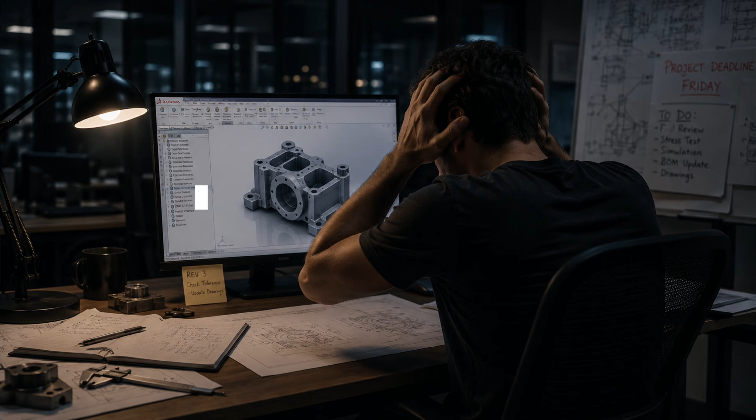Now we're only 4 years into the future, and the time for safe debates is over. The theoretical threat is now a reality, and the answer is no longer a mystery. If you're not above average, you will be replaced—not by AI, but by something far more likely.

Since the start of 2026, I've been living with a high level of stress. I've spent 19 years in this industry. My lifestyle, my business, my source of income, built on SOLIDWORKS. I got tired of searching for answers from experts who don't actually model, so I decided to find the truth for myself and for other mechanical engineers.

I decided to build an AI that could replace me. I went dark. I stopped uploading YouTube videos. I stopped responding to my emails. I spent 10 hours a day, every day, working with Claude Code and SOLIDWORKS API. I took advanced classes, failed 1,000 times, and pushed myself to a breaking point to see if my 19 years of experience could be reduced to a single prompt.

3 months in, I built what I call cadBase. It's a module that companies have raised millions to develop, and I built it alone in my room. And when I finally ran the comparison, I was both shocked and relieved.

This baseball bat was designed by an AI. You see, it has the details, it has the handle. Look, I 3D printed it. Home run. It was not made by me. It was not made by a human. This is made by AI.

Now I'm going to demo this, because obviously I have practice with a baseball bat. But what I have not practiced are a bunch of random things I'm going to ask it for the first time, on screen. Design a baseball bat. I wish I made a timer. I can count 1, 2, 3, 4, 5 and add the rest to it.

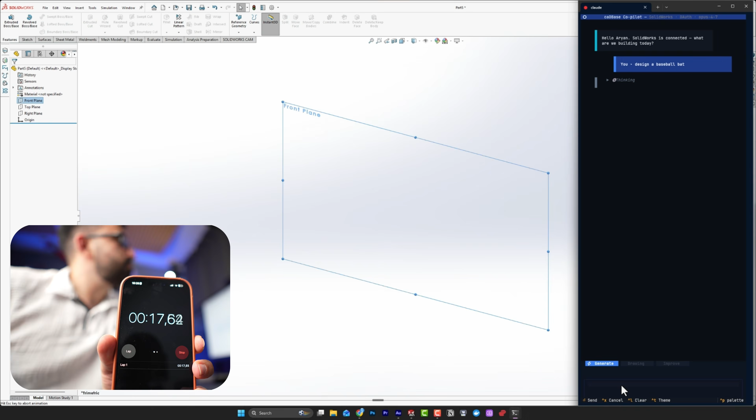All right, how much? Pause, stop. This is the baseball bat. Now let's continue with more advanced stuff.

Round all the sharp edges. Okay, sharp edges are rounded. I can see that. Now let's try to make things I haven't seen.

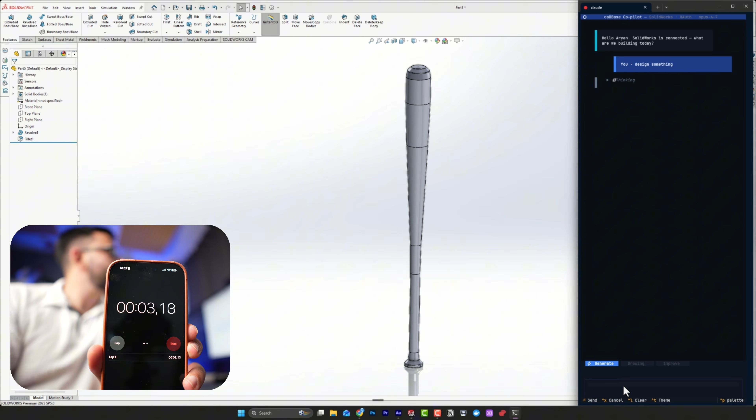It's gonna be fun. Okay, let's go with, design something. And let's time it. Is that a rook? I play chess. It looks like a rook.

Design a pawn. What? Oh, it wasn't finished, it was still working—that's why I couldn't type. The pawn's started, we have a pawn. Let me see if the rook actually worked or failed. Failed silently, last feature. All right, let's design something else.

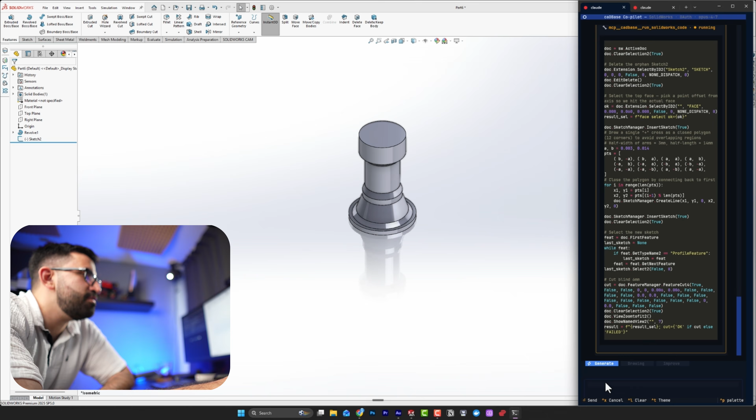What if we ask it to design a bishop? Maybe I can 3D print all the chess pieces that cadBase designs for me. All right, let's see—looks kind of like a bishop-y thing. I'll take it. All right, let's just do one more.

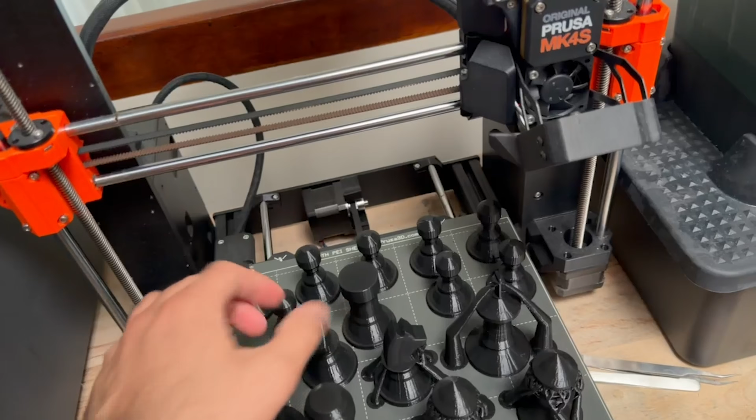Design a queen. Oh, the knight—the knight is gonna be challenging, huh? Okay, that's your queen. Not very queeny, but okay, we'll take it. Design a knight.

Riddle me this: 2 years ago, a beginner would have nothing to do, would stare at a blank canvas. Today, the beginner is right behind me. Think of AI as this tsunami—it's raising the floor. The beginners are being lifted up towards the pros. The gap is shrinking. But here's the part nobody's saying: AI didn't move the ceiling as much as it pushed the floor up.

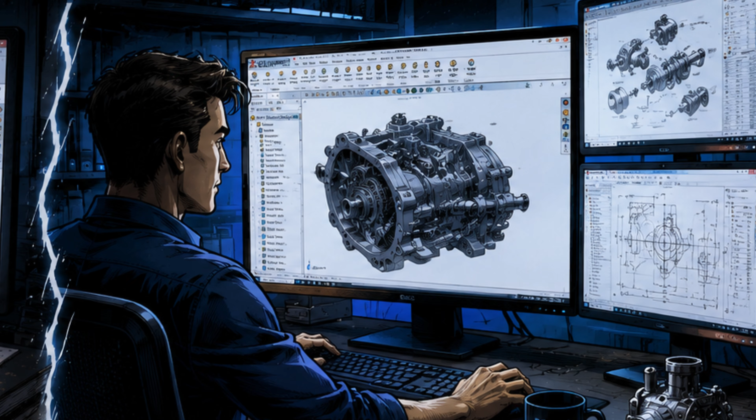If the water level is rising, the only way to stay relevant is to move your ceiling higher than AI can reach. Think about it: a few years ago, when a beginner had to look at a blank canvas, companies would pay top dollar to get pros and experts, because that extra money they paid brought them a huge difference in quality and speed.

Today, they're getting less leverage with the same amount of money paying for a pro than just an intermediate who uses AI. So the money they're paying today is not bringing that much ROI. That's why it's important to understand design and design intent, and not just memorize buttons.

And that's how I designed all of my courses for my students. It's about engineering logic—you need to oversee the AI. Because while the floor is rising, the history of our industry shows us that the tool is only as good as the person driving it. We've seen this once before.

I haven't, but some of you might have, back in the early 60s when Sketchpad came to life. Mind you, NASA created Apollo 11, planned and executed successfully before CAD—nothing but drafting tables, slide rules, and hand calculations. Those guys were giants, and if you're a mechanical engineer, you'd have respect for those engineers.

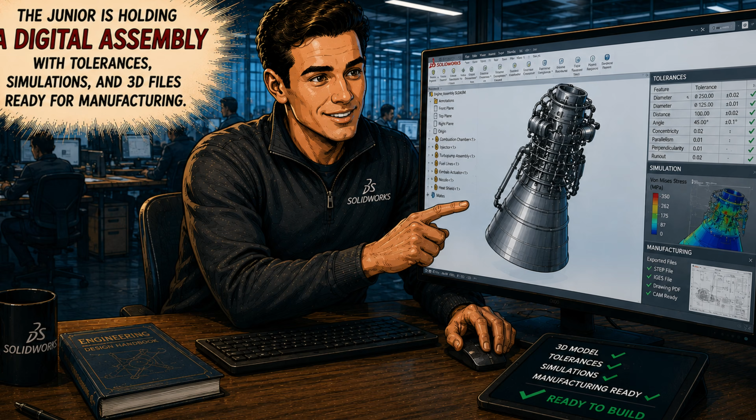But if you brought one of those giant NASA engineers from the 60s to 2026 and sat him next to a junior engineer fluent in SOLIDWORKS, who gets the job done faster? The NASA engineer might design something flawless, but he's holding a pencil and paper. The junior engineer is holding a digital assembly with tolerances, simulations, and 3D files ready for manufacturing. The junior might replace the giant, not because he's a better engineer, but because he has the better tool and he's more acquainted to it.

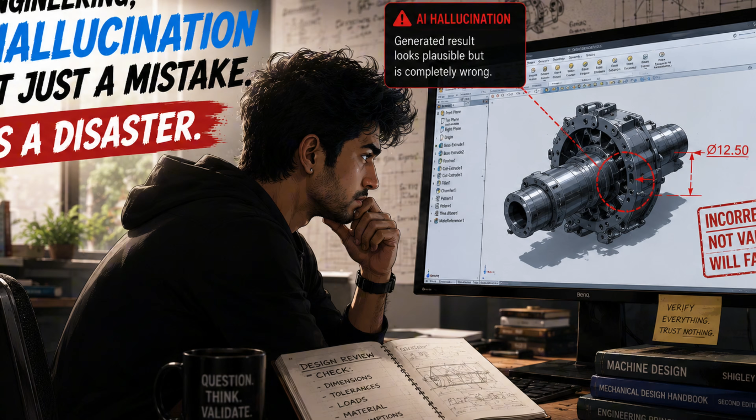The replacement isn't by the tool, it's by the user who uses the tool—in this case, the CAD designer who uses AI. But using AI doesn't mean asking ChatGPT to design a gearbox. That's a liability. In engineering, a hallucination isn't just a mistake, it's a disaster. If the water level is rising, you need a boat, not a toy.

But here's the thing: building a part is only one layer of this problem. My little AI module showed me what's coming—it can create basic models and help beginners. But as a real mechanical engineer, you need more than that. You need an AI that can understand materials, fasteners, mechanical concepts, previous designs, PDM, calculations, and a lot more.

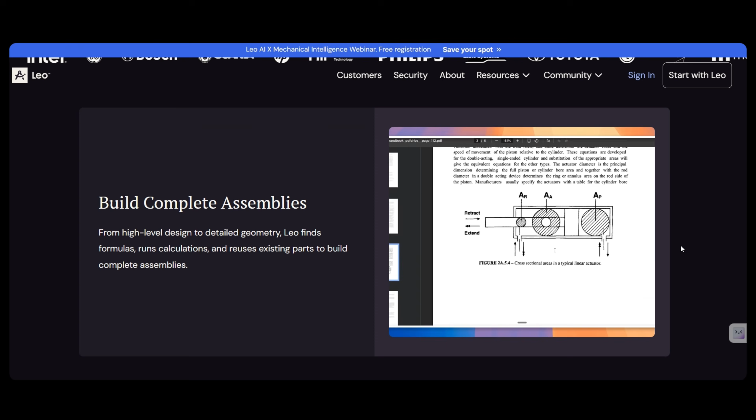For bigger companies, if you're working among thousands of other engineers who have been around for years, it crawls into the PLM. It finds the designs that already exist, scans the design you're doing, and tells you, hey, you don't have to reinvent the wheel—you already have a similar component designed and ready, you just have to use it in your design. You don't have to redesign this spring, for example, because the company had already designed these springs over the years, and you have so many options that are more or less compatible with your design. And even if it's not, it can generate one for you.

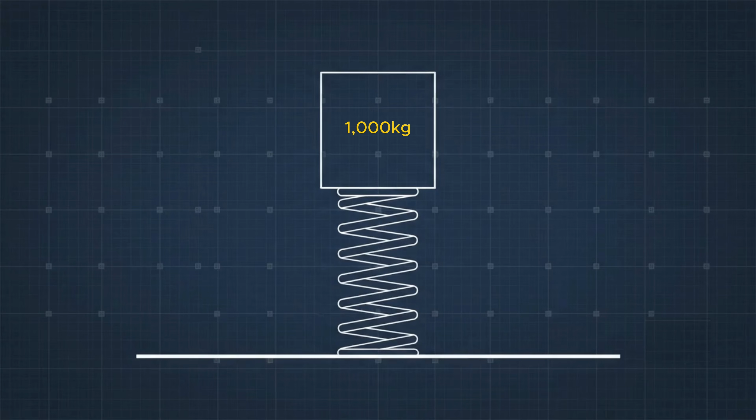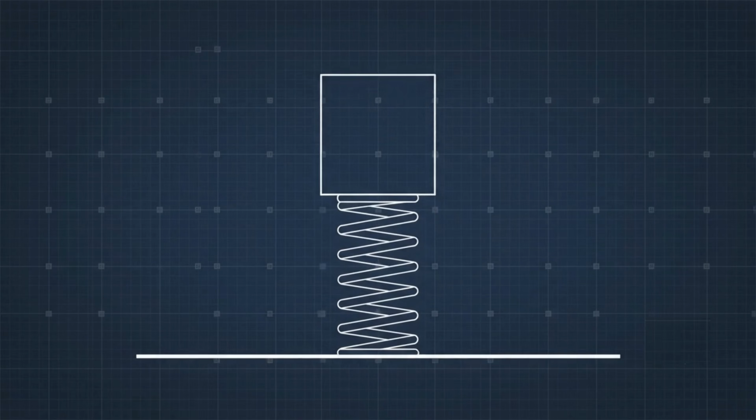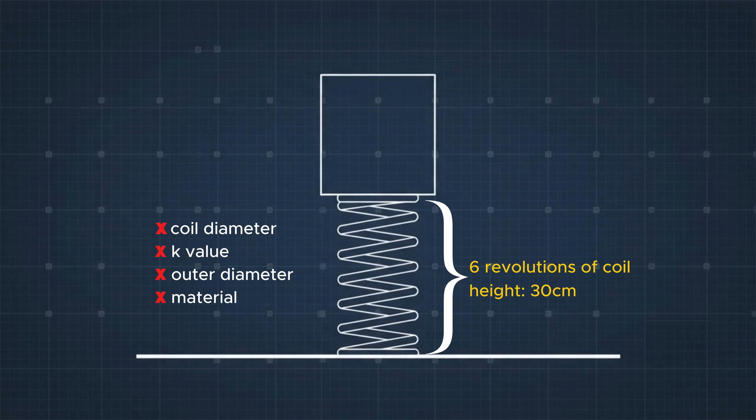Let's put that into a demo. I am designing a spring to put under my elevator, and I want the elevator to be about 1,000 kilograms. So when the elevator lands on the spring, I want the spring to compress 10 centimeters. This spring has 6 revolutions of coil. The height is about 30 centimeters. Now, I don't know what the coil diameter should be, nor do I know what the K value for the spring should be, or the outer diameter of the spring, let alone the material. I need you to do the calculation for me and tell me the material I need to use, the outer diameter of the spring, and the diameter of the coil.

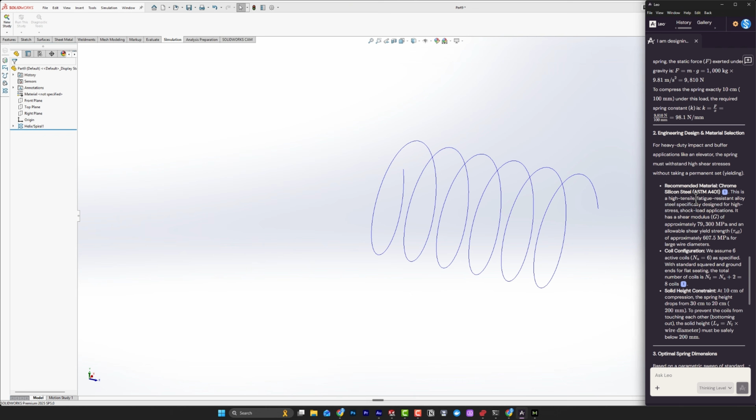Can you do that? Over here I have the thinking level—I'm going to leave it on auto and let Leo decide which one is required for this question. All right, it's bringing the formulas up. Something gorgeous just happened here. You see these numbers? These are my references. Look, it gave you the recommended material, chrome silicon steel, ASTM A401, which is something I created in SOLIDWORKS before because it's a very useful material. But look, it gives you the reference.

When I click on it, it opens the page on that reference book, and it brings up 2 pages before that page and 2 pages after that. So this is where the formula is coming from. It's highlighted, as you can see.

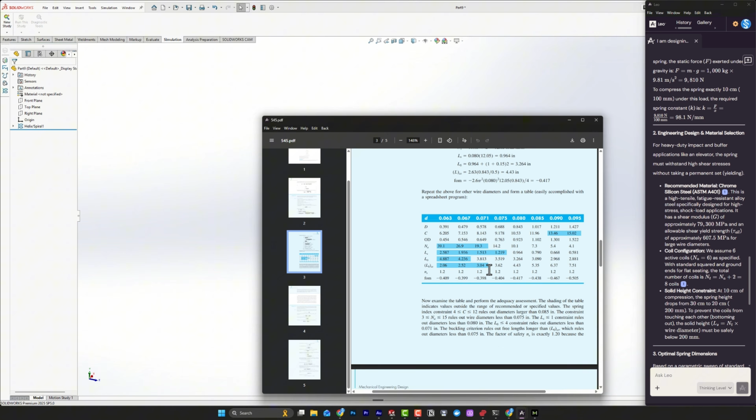It's not just randomly throwing it out there like ChatGPT or other LLMs that you have to take at face value. It opens page 523 where this formula is stated, and tells you here's your reference. This is your assurance. All right, the spring looks like this.

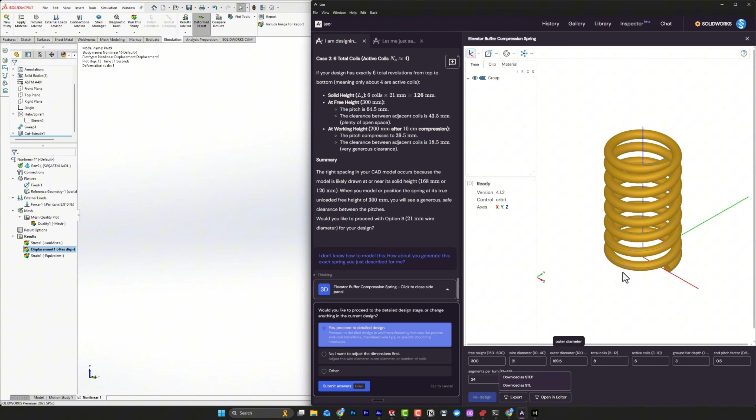Also, if you don't have the means to generate the CAD model yourself, maybe you don't know how to or you're not able to, Leo AI also has a built-in generative AI to generate some CAD models for you that you can download and import into your model that works the same.

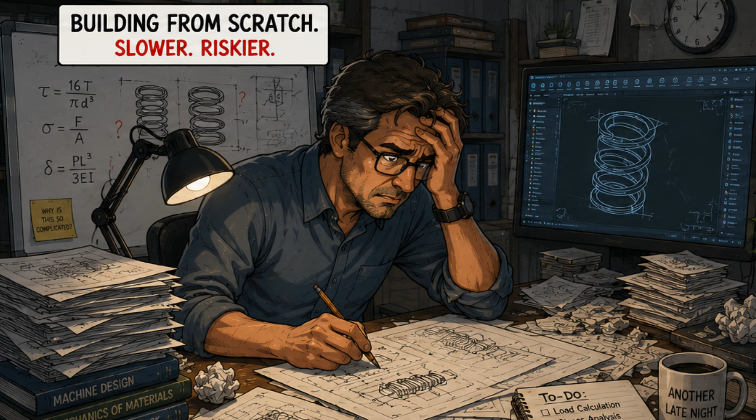Now, imagine you don't have that luxury, imagine you don't work with a tool like this and you are a senior engineer. You are given a task, you start to design everything from scratch. Of course that works, but that junior engineer next to you with less experience who uses something like Leo immediately finds the design and immediately pulls himself ahead of you. He's faster, it's more reliable, and it's a battle-proven component because the company has made it before.

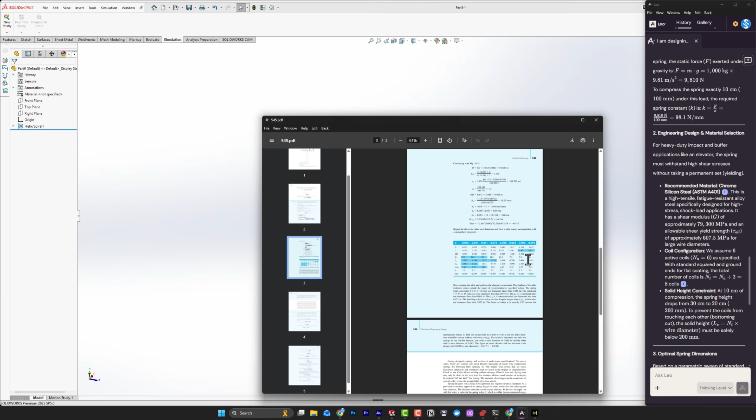So you would need something like that for a mechanical designer, not something like ChatGPT to tell you, oops, I was wrong, sorry, when it makes a mistake, because you are the one taking the responsibility. And you want something that can actually show you the proof of how it is calculating that recommendation it's giving you, not just, it's like that.

Only then you can say, I'm a CAD user, a mechanical engineer who is acquainted with AI. Now you are becoming a little bit less replaceable. You are more valuable because you're upgrading yourself. You are qualifying yourself to move to the next level, to the next generation of designers.